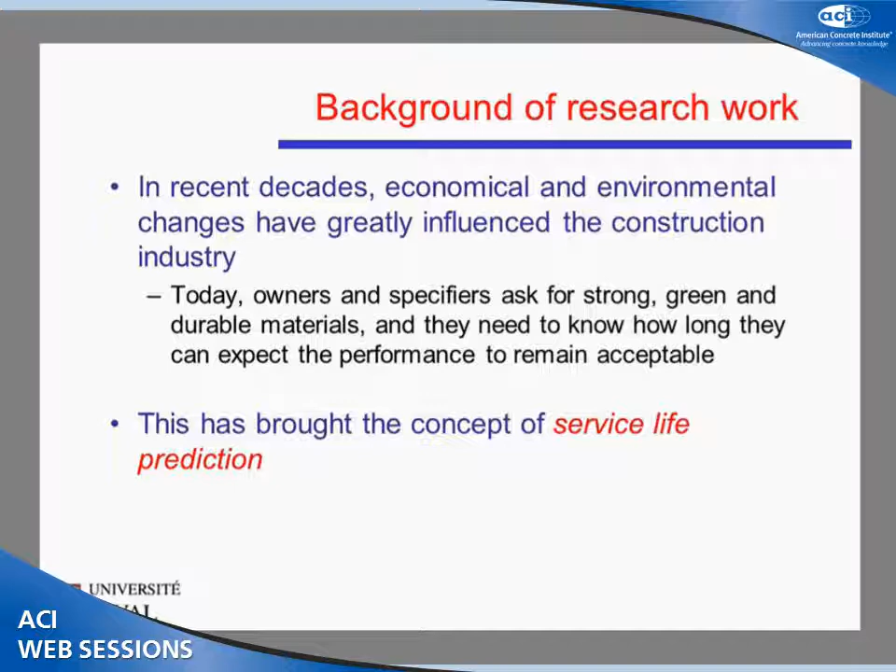And this has brought up the concept of service life prediction. Now in the concrete industry, those changes came along with performance-based specifications and models that allow a quantitative evaluation of the durability of concrete. Now a lot of work has been done on regular cast-in-place concrete, but very little information is available on that subject for Shotcrete specifically.

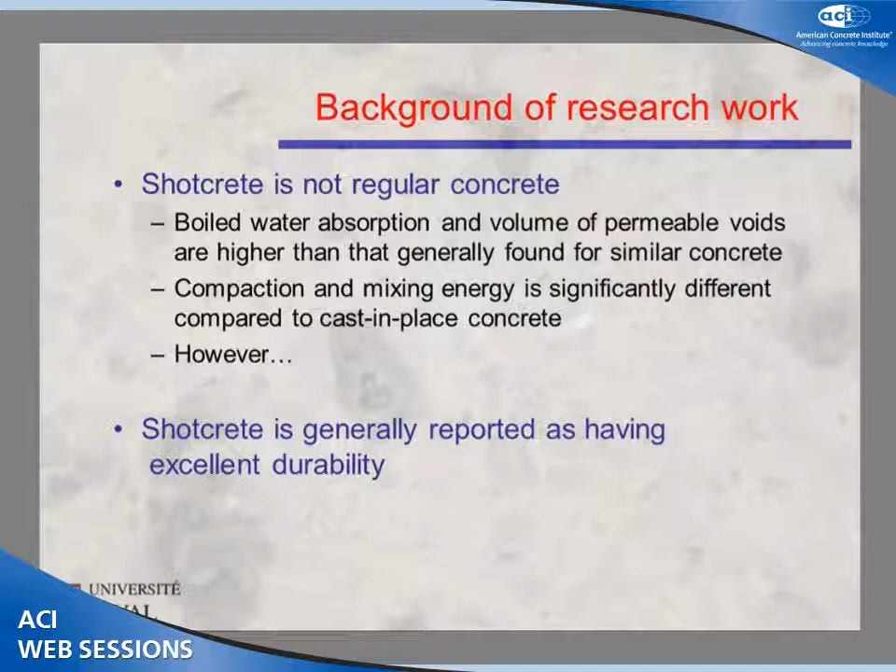However, even with these higher absorption values, it is generally reported that Shotcrete can have an excellent durability. Another aspect that triggered this research project was that in the Shotcrete industry, the spec usually called for a maximum value of boiled water absorption from the standard ASTM C642.

And for those of you who attended the 506 committee meetings, you know that this was a hot topic, because with the higher boiled water absorption, contractors and producers have to modify and improve the mixtures at great cost. And this has brought a lot of discussion.

What we have here is what was the main reference in terms of boiled water absorption for Shotcrete. This is a table that was built by Mr. Rusty Morgan in the 80s. In his study, Mr. Morgan, from existing structures, compiled several boiled water absorption results and linked the result with the quality of the structure he observed.

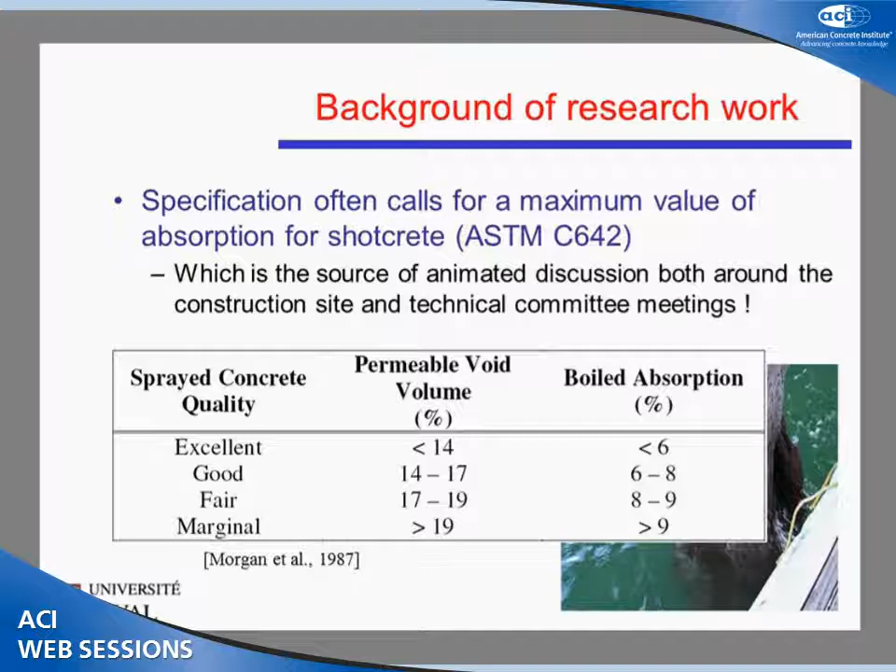Now this is a very useful table because it's easy to use, it's cheap, and it's quick. However, it's important to understand that it can lead to misleading results because it was used by engineers as a durability criterion, and we'll discuss this later.

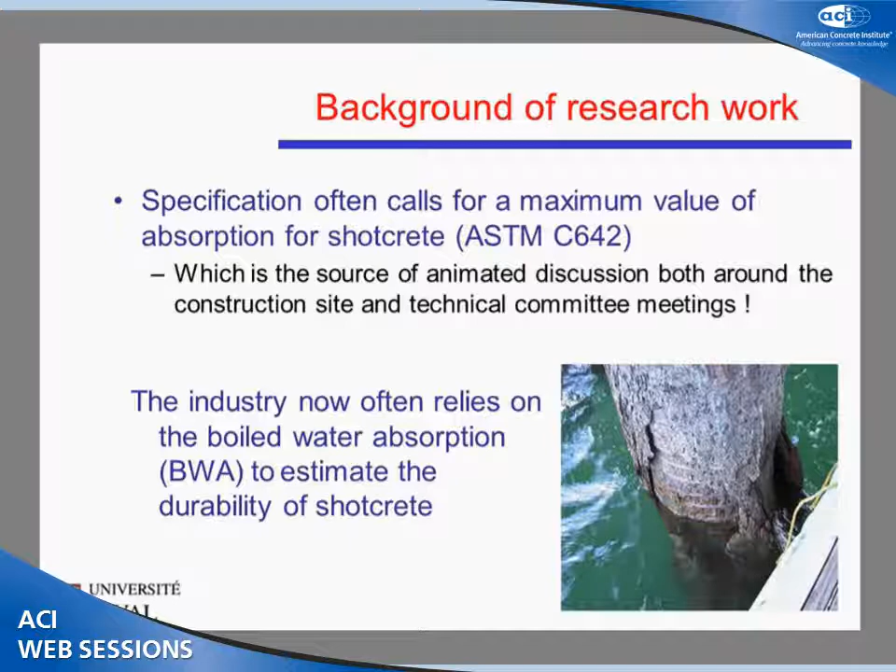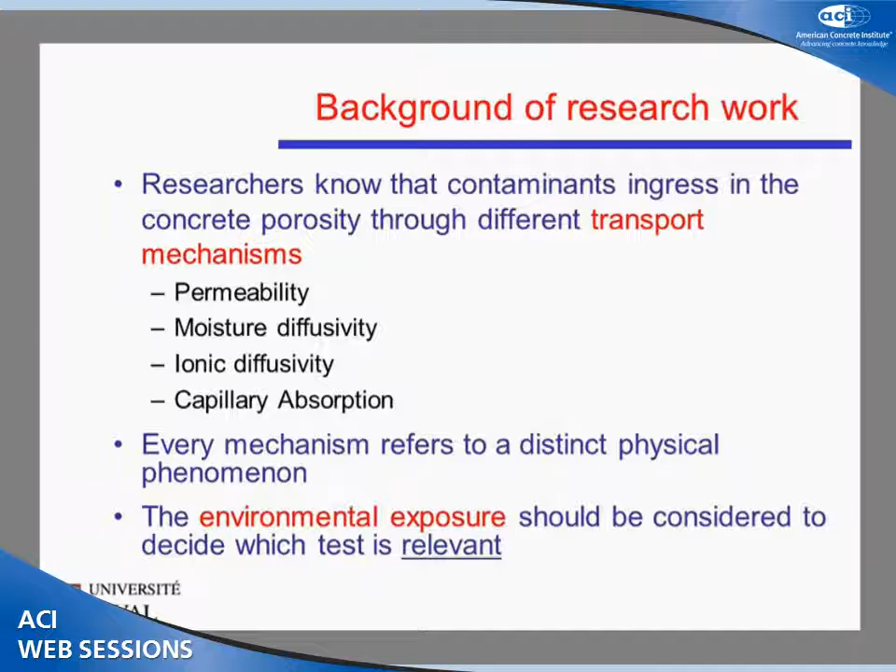Now why this table can be misleading is that it is now well known that contaminant ingress in the concrete porosity relates to different transport mechanisms, such as permeability, moisture diffusivity, ionic diffusion, capillary absorption, which are all different physical phenomena. This is very important to understand because the boiled water absorption test only indicates the capillary absorption. Also, depending on the environmental exposure to which the structure is exposed, it doesn't necessarily mean that boiled water absorption will be the relevant test.

So we saw that there's no existing data on Shotcrete service life and that a questionable test is used as a durability criterion. With this information, there was a need to go further on that subject, and that's what triggered the research project.

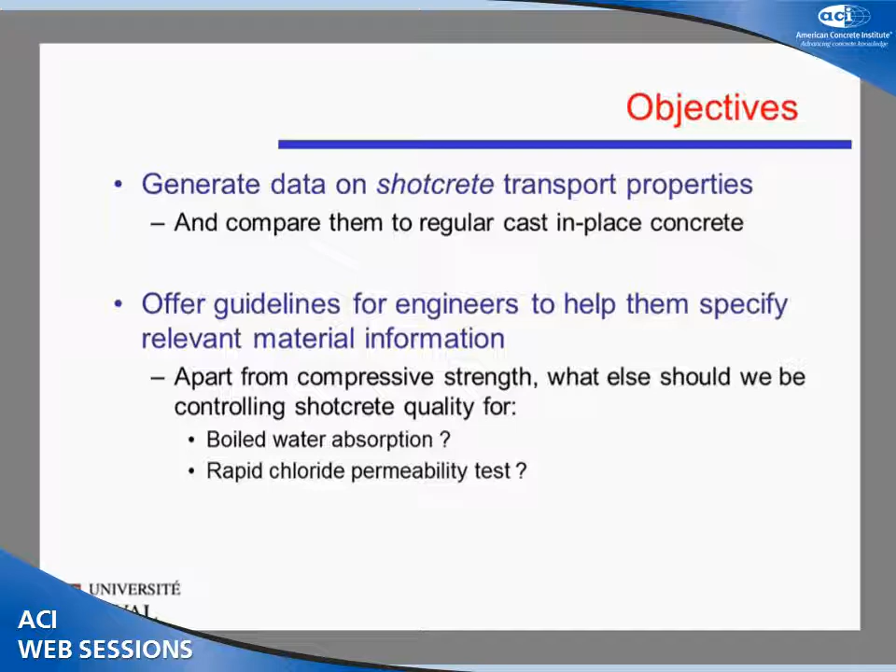The objectives of the project were first to generate data on Shotcrete transport properties and eventually compare them to regular cast-in-place concrete, and to offer guidelines for engineers to help specify relevant material information. Apart from compressive strength, what else should we specify? Boiled water absorption? Rapid chloride permeability tests? Should we go further? That was one of the objectives.

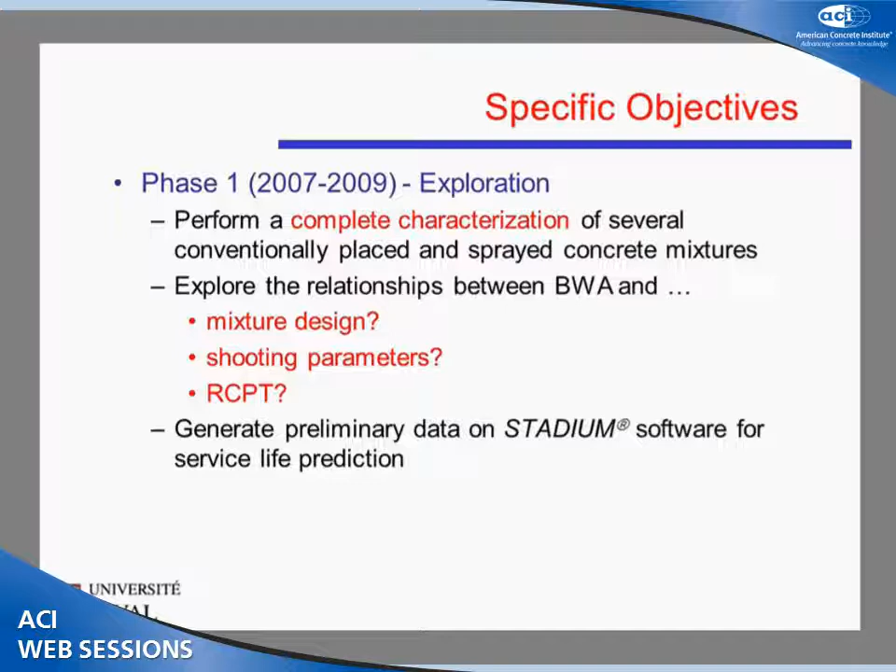The project was divided into two phases. Phase one, which was my master's project, ran between 2007 and 2009. We performed a complete characterization of several cast-in-place and sprayed concrete mixtures. The objective was to explore the relationship between boiled water absorption and mix design, shooting parameters such as speed of impact and pre-dampening, and to evaluate if there's a relationship between boiled water absorption and rapid chloride penetration tests. Another objective was to generate preliminary data on stadium, which we'll discuss later, for service life prediction.

Based on my results, Patrick's project is phase two. His objectives are to perform a complete characterization of a more focused mixture selection based on the results we already have, to confirm or invalidate the data from phase one, and to perform refined analyses using a service life prediction software.

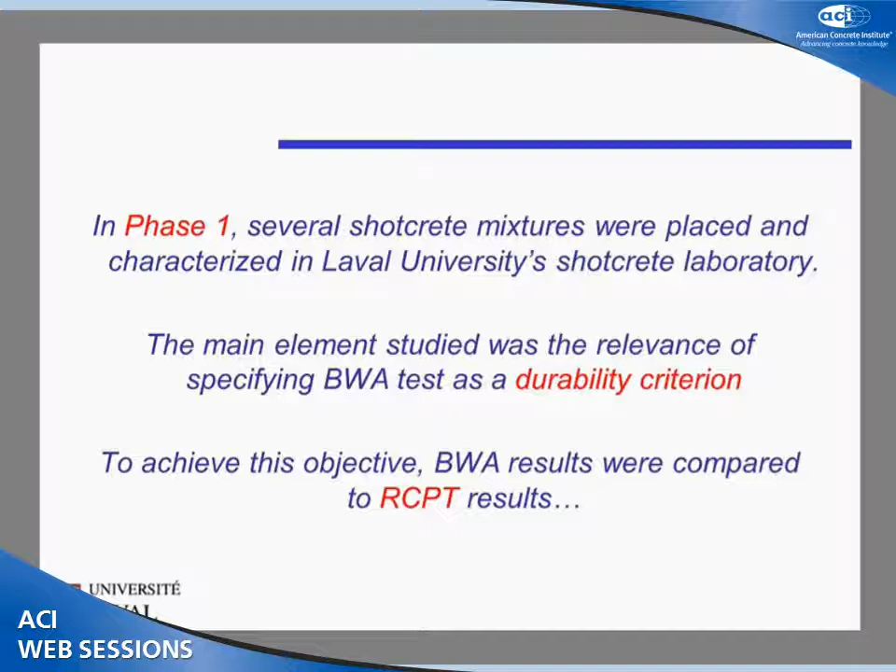We're not going to go over what was done in phase one in detail, just talk quickly about one key element. I won't bore you with the experimental program since it was already published and presented in St. Louis in 2008. I just want to look back at one key result: the relationship between boiled water absorption and RCPT results.

To assess the correlation between these two test results, data were plotted on a graph, which is what we see here: RCPT results against boiled water absorption results. It's important to know that RCPT is a test to estimate the ionic diffusion of the material, and I say estimate because it's not necessarily dead on. The boiled water absorption test is a test that measures capillary absorption.

What we see here are the limits that were set by Mr. Morgan in the table discussed earlier, and these are the results from the Shotcrete mixtures characterized in our lab at Laval. At first sight there's no direct correlation between the two tests. But going further, these are limits found in ASTM C1202, the RCPT standard, which indicate the chloride ion penetrability.

The first: the point at the bottom right is a mixture qualified as very low penetrability, but it would have been rejected because it's marginal based on boiled water absorption. Looking at the results up top, the mixture would have been classified as excellent based on boiled water absorption, but RCPT tells us it has high chloride ion penetrability. So this graph points out that the absorption test can lead to misleading information.

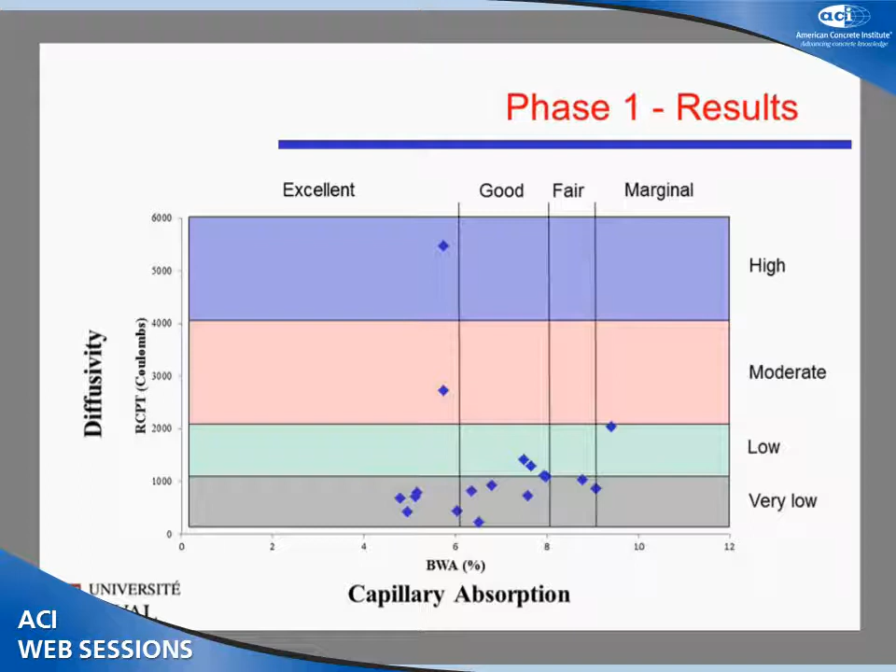We wanted to understand why the data were so scattered, and we realized that all the mixtures in the cloud down there contain silica fume. The mixture here contains fly ash, and the one up there contains only ordinary Portland cement. So we see the influence of supplementary cementitious materials.

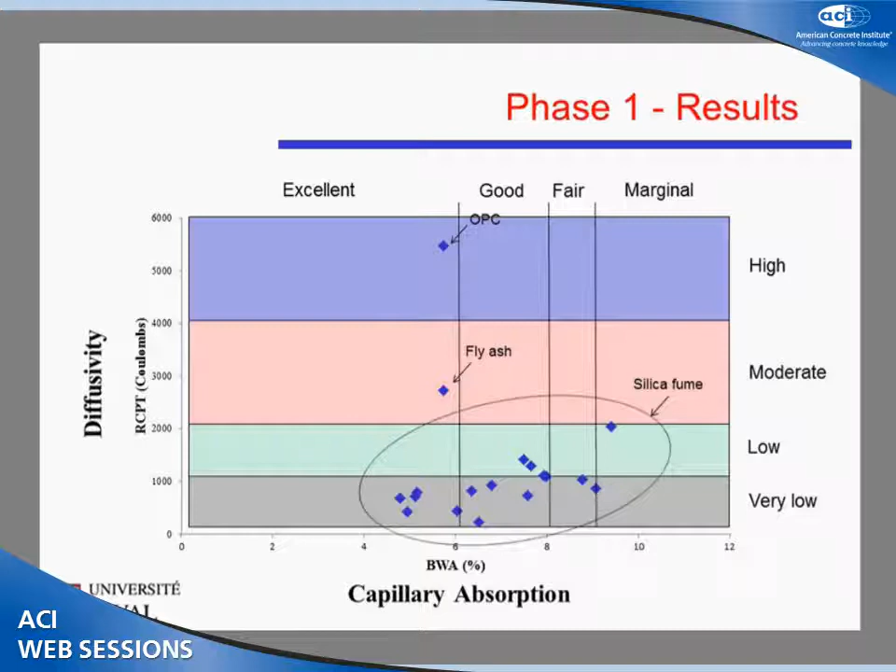This brings us to service life prediction. From the phase one results, it appears that boiled water absorption poorly correlates with rapid chloride penetration tests. It's also worth noting that RCPT doesn't necessarily help owners and engineers estimate the service life of their structures—it gives you Coulomb results, but doesn't tell you how many years you can expect your structure to remain in acceptable condition. So the next step in our investigation was to answer: how can we predict service life of Shotcrete?

So there are numerous models that are available to predict the service life of concrete. Here, when I'm talking about service life, it's mainly related to the time to initiate corrosion. It doesn't include freeze-thaw effects or others.

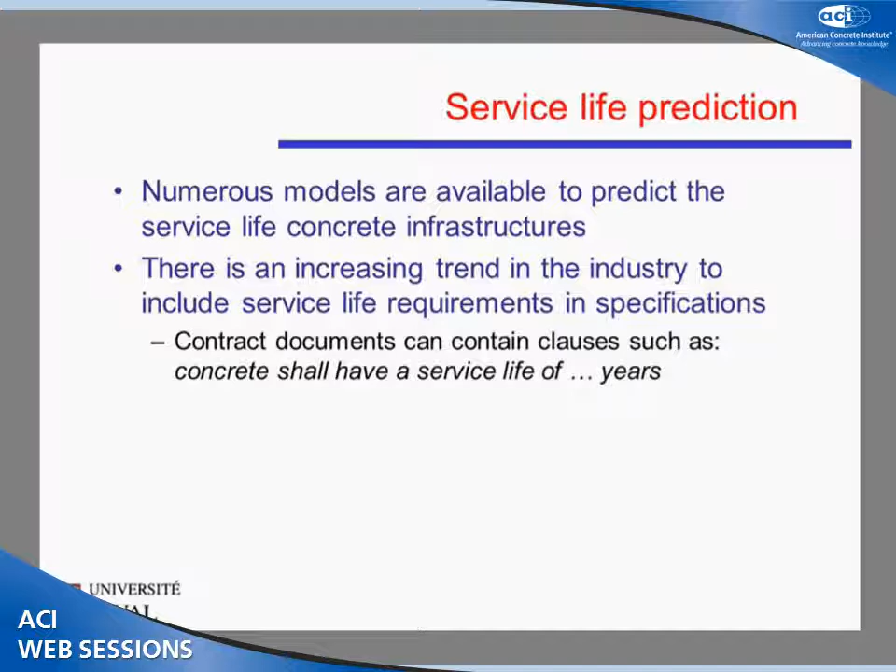So there are numerous models, and it's worth mentioning that these models are no longer only used in the lab for research, they are used in real projects. You will find clauses in contract documents that say concrete shall have a service life of blah, blah, blah years. This is becoming more and more common. It was the case for the Panama Canal, but also for smaller projects such as parking structures, rehabilitation projects, or any other structures for which durability might be a concern.

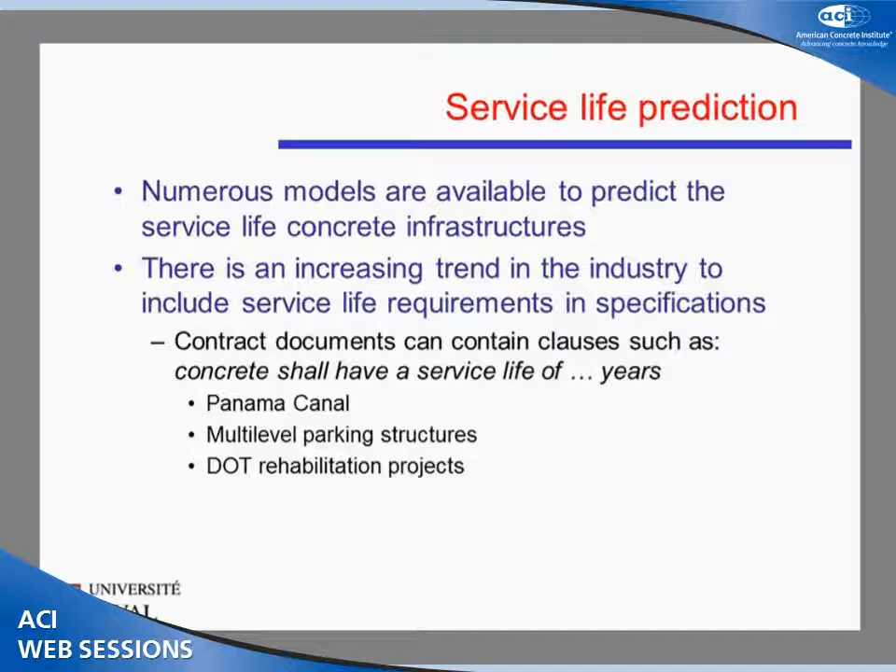Now, as I said before, very little information is available for Shotcrete specifically. So what we did in our case, we performed several tests that are required as inputs for service life prediction.

I'm talking here about a migration test, which is a modified version of ASTM C1202, the regular boiled water absorption test, an in-house drying test, and an analysis of the pore solution of the mixture tested.

With these results, we were able to use these inputs in a service life prediction software called Stadium. Stadium is a numeric tool that predicts the ingress of corrosive species in cementitious materials.

With these inputs, the model is a multi-ionic model that considers both mass and energy transport equations and chemical equilibrium equations that are necessary to understand how the contaminant ingresses. There could obviously be a lot to be said on this software, but that's not the intent today. We just used it as a tool to generate data on Shotcrete service life. So we're going to leave it like this for this presentation.

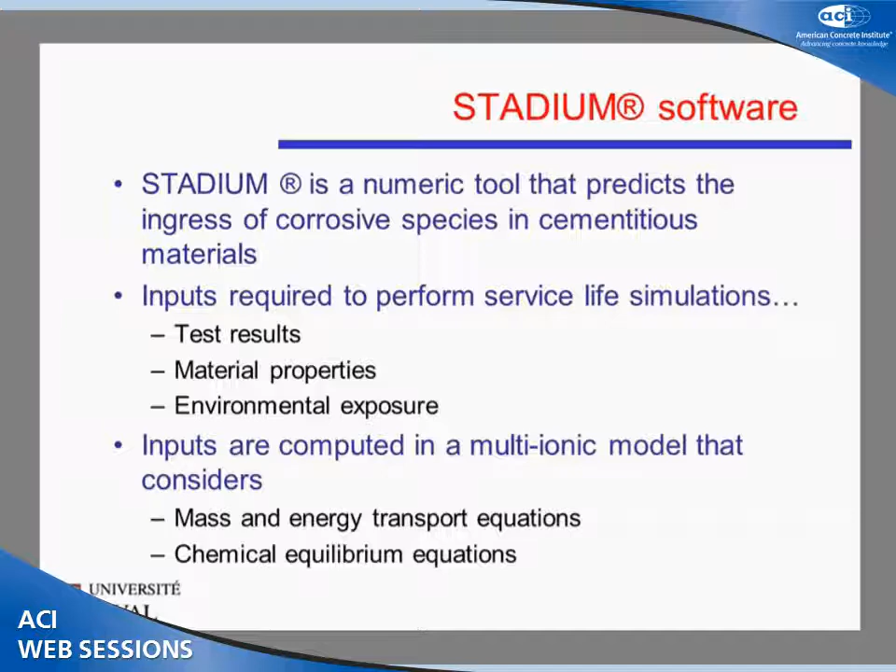Thanks, Sam. This is the first part of the Stadium part of our project. Essentially what we have here, there are two things I want to point out. The first is the geometry of the structure that's being considered. We decide what type of geometry we want to use to simulate the conditions that you would have in situ. The second is the environmental exposure that you would consider for that structure or section of the structure.

For example, the location we are considering is Quebec City. The exposure type is seawater. You can see here that this structure is saturated on one of the surfaces for a short period of time.

As a matter of fact, there's a chloride content here, so it's completely submerged for part of the year. And then for the rest of the year, it's actually dried at humidity about 70%, which is normal for Quebec City. That's how we design our simulation.

You can also vary temperature. You could take this and change temperatures. You could also change the amount of chloride that you're considering, is it seawater, is it de-icing solution. That can change. You can also change the humidity percentage.

Another thing I was going to forget to mention is that we are considering 20 years. So this simulation is going to run for 20 years.

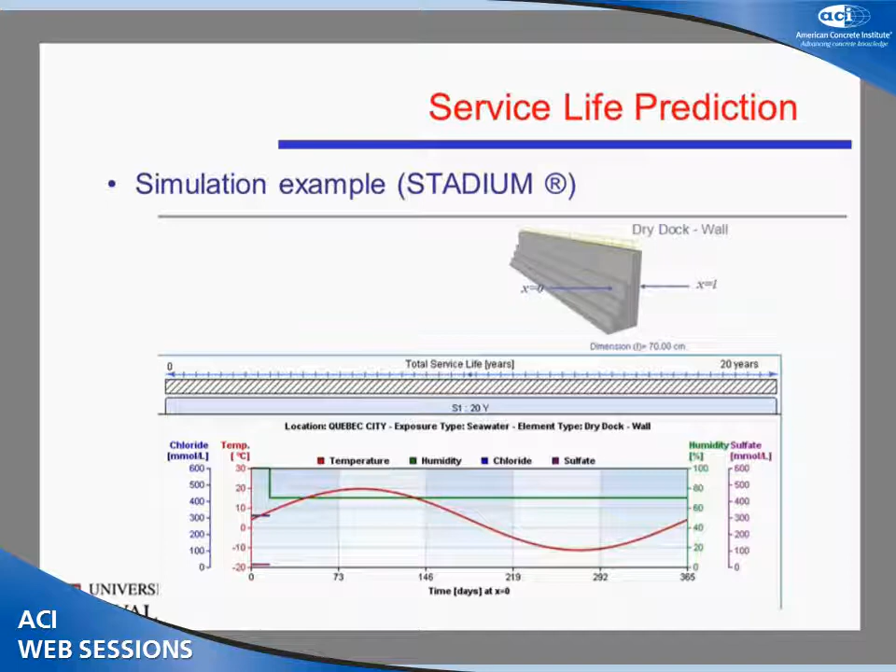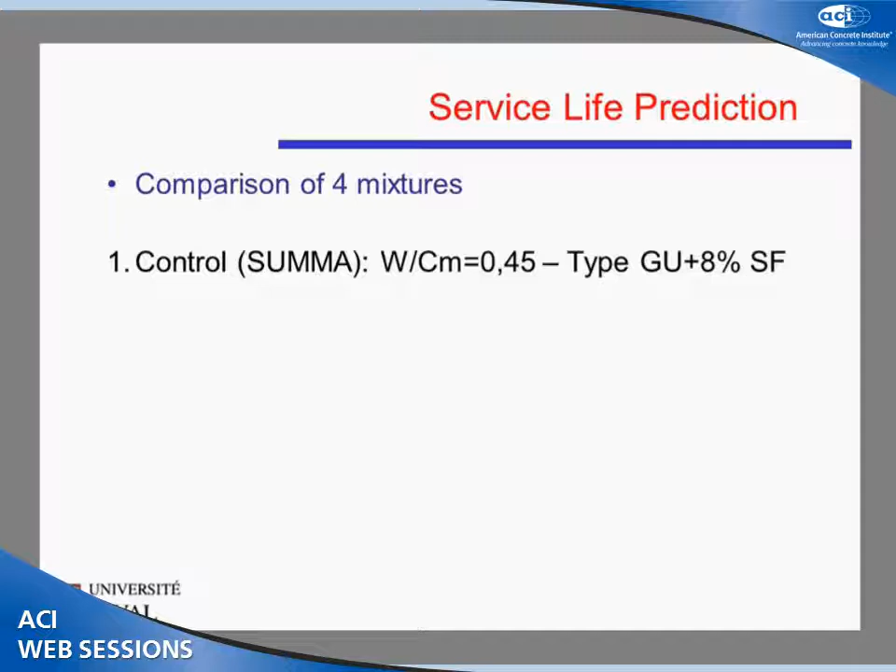For this simulation, we considered 4 mixtures. Simultaneously, 4 mixtures can be considered for that geometry. The first one is a control mixture from the SUMMA data bank, part of Stadium, with a water cement ratio of 0.45, a binder content from OPC and silica fume, 8% silica fume replacement.

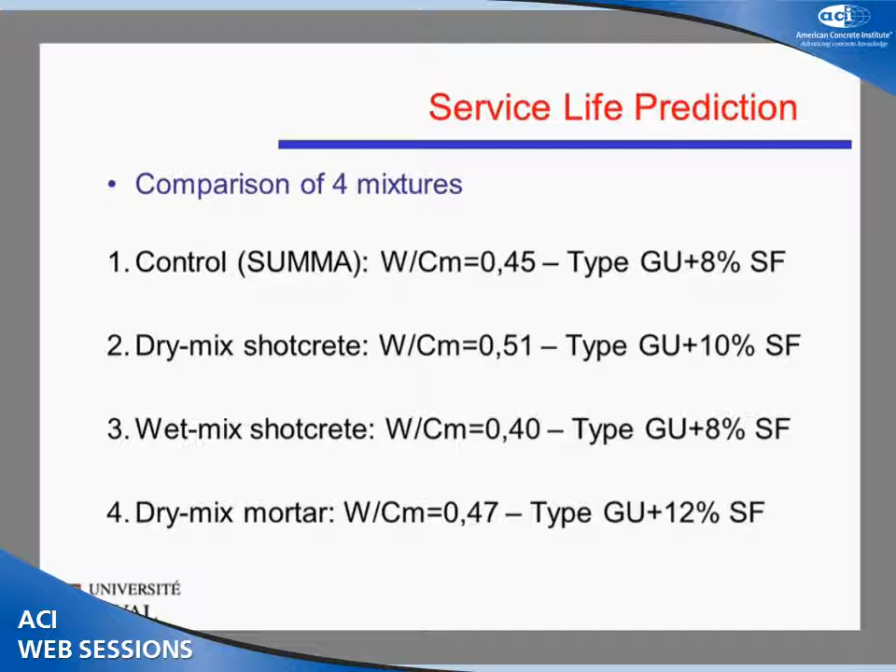The two other mixes we considered are both dry mix and wet mix with silica fume. The first has a water binder content of 0.51 with 10% replacement of silica fume. The third mix, wet mix Shotcrete, has a water binder content of 0.40 with 8% replacement. The last mix considered in this example is a dry mix mortar, with a water binder content of 0.47 and 12% replacement silica fume with type 1 OPC cement.

So this is what it looks like once it comes out.

First of all, let's start with the axes. The first is X, the duration of the simulation, 20 years. You can change that, but we decided to start with 20 years. The Y-axis is the total chloride content at

25 millimeters, about an inch. You could also change that. You could consider 2 inches, 3 inches. 1 inch is, for example, you could consider that as a bad cover for concrete. So let's be critical here. That's 25 millimeters. What you have essentially is the SUMMA mix on top, followed by the dry mix, the wet mix concrete, and the mortar at the bottom.

Essentially, you can see here that according to the simulation and the exposure, considering both the chloride content I just mentioned and the humidity, you can expect about 14 years service life before you hit the critical threshold. A critical threshold we chose for black steel, followed also by the other mixes which follow shortly after.

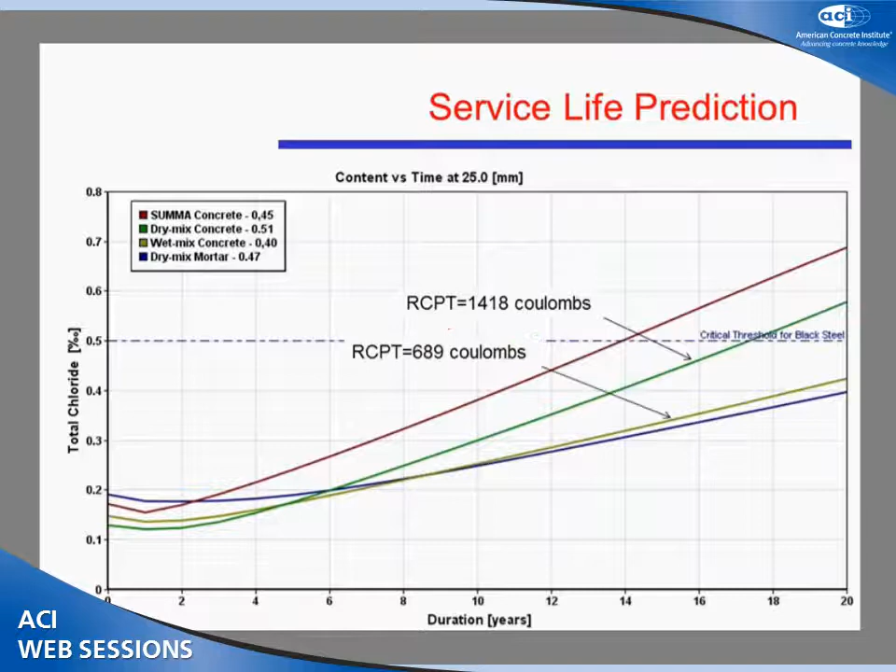What happens if we consider ASTM C1202, RCPT, that we presented just earlier? Well, this time it's not so bad. I'll talk a little more about that later, but it doesn't seem so bad. You have, for example, the dry mix concrete that hits 1418 coulombs, just as a rough value. Remember, it's between 0 and 9,000. 9,000 is a critical value that you rarely get, and you want to go around 1,000 to 3,000 for something standard, where under 1,000 is excellent according to the ASTM norm.

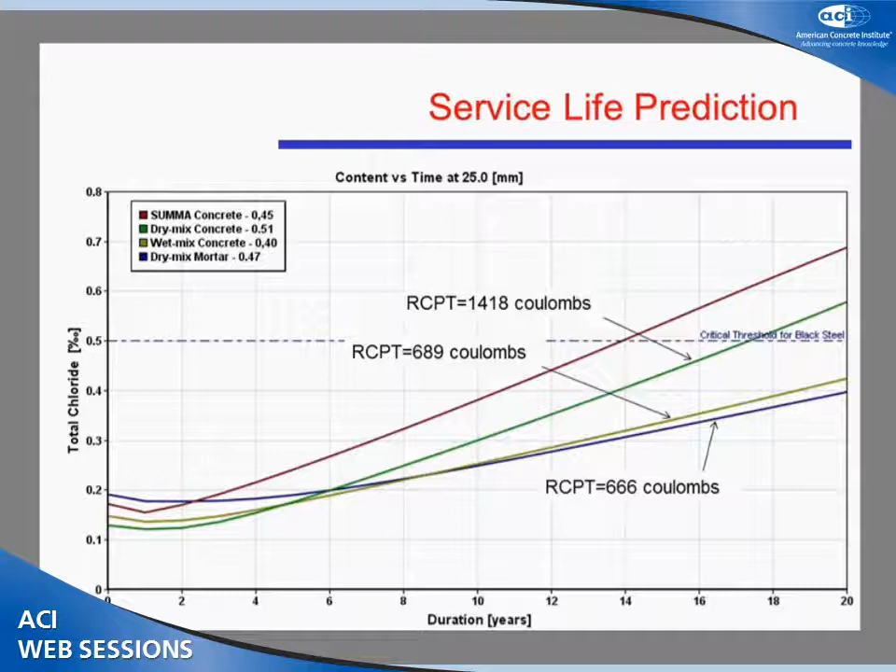So this is not so bad. It actually somewhat correlates with this analysis. However, that's only for 3 mixes. What happens with the rest of the mix designs that exist in industry right now in North America, and as a matter of fact, the rest of the world? This is only for 3 mixes, and that's what really motivated us to keep going with this.

So based on results from phase 1, we decided to go further with that. We decided to expand the mix designs that could be represented for industry. The goal we had in mind was the goal that Louis-Sam just mentioned earlier: we wanted to have essentially information, and hopefully a line drawn to service life assessment of Shotcrete.

These are the mix designs we selected. Actually, these are the mix designs offered to us by industry, because we wanted mixes from industry. I'm just going to go quickly here, there's a lot of details. This is essentially what it is: the first 3 are mortars. The first 2 are dry mix mortars. The third one is a wet mix, all OPC, with essentially the same ACI number 1 grading.

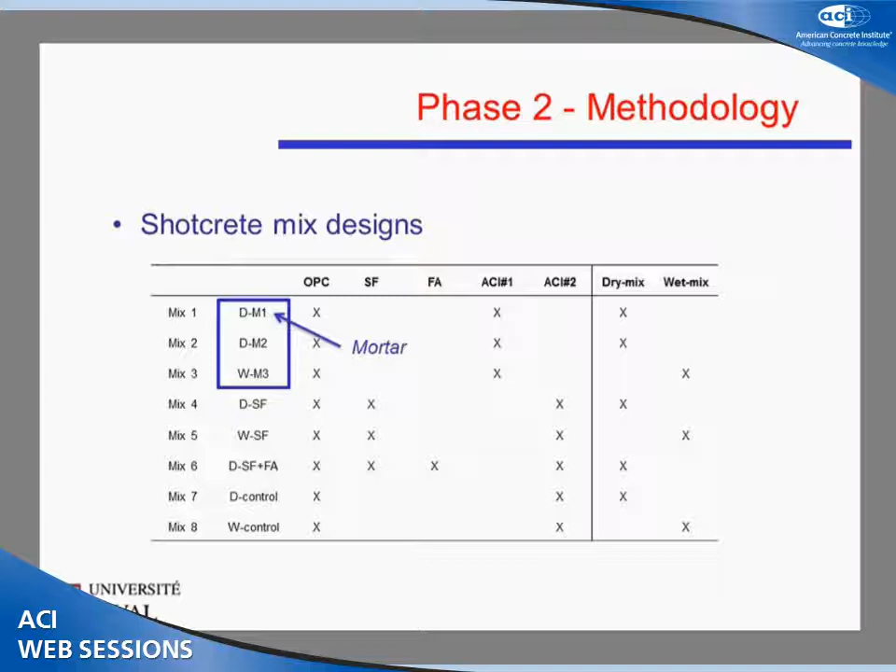The second group of mixes is silica fume shotcrete, so coarse aggregate, both dry and wet mix. These are common in East Coast Canada and the United States, Northeast. The third mix to be considered is a ternary binder, where the ternary binding agents are OPC, silica fume, and fly ash. This is usually more found on the West Coast and Vancouver. This is actually where the mix is from, Alberta, Vancouver.

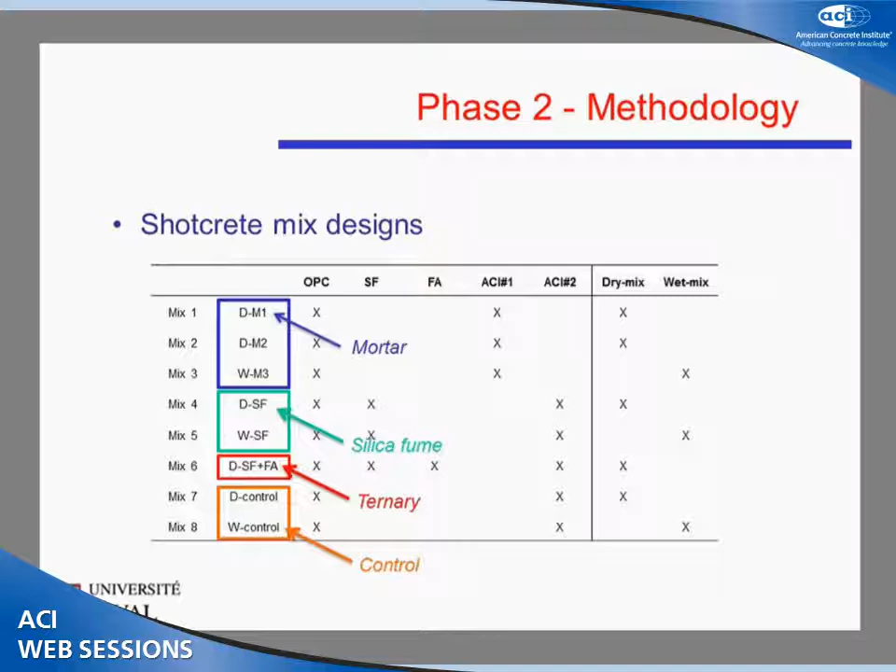The control mixes, because you've got to have control mixes. We have a dry mix and a wet mix, again with the same coarse aggregate grading, just to have an idea.

Now, how do we shoot the material for phase 2? We wanted to control the shooting energy into our panels. This is something that one of my colleagues, Nicolas Ginouse, is studying as part of his doctoral studies. So we wanted to control the shooting parameters. How do we do that?

Well, first of all, let's represent industry. Let's shoot perpendicular, you want to have maximum impact energy, so let's start with that, followed by two other things. The first is the distance. We're going to control the distance at about 1 meter, give or take an inch or so, so 3 feet 4 inches. And we also want to control the airflow.

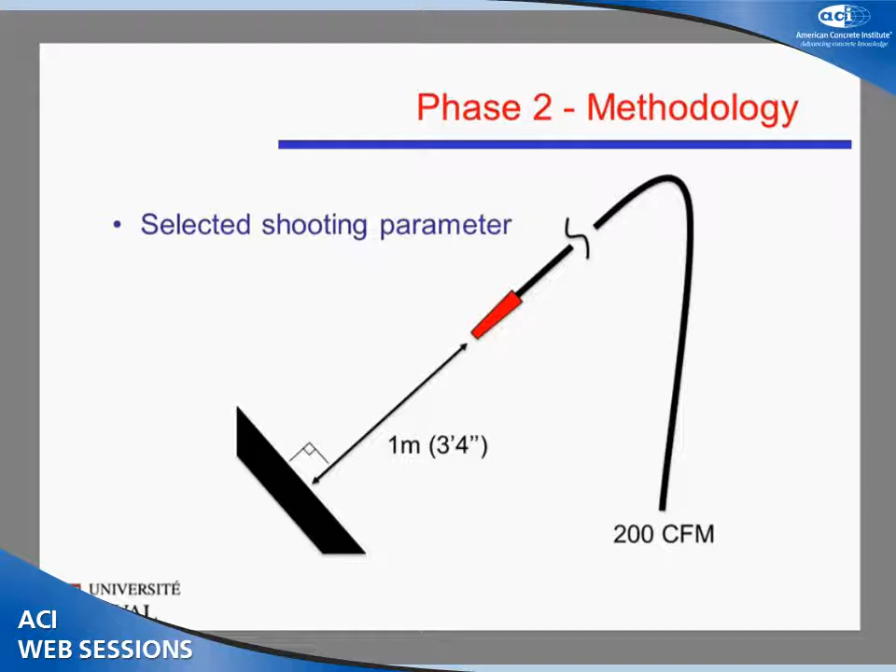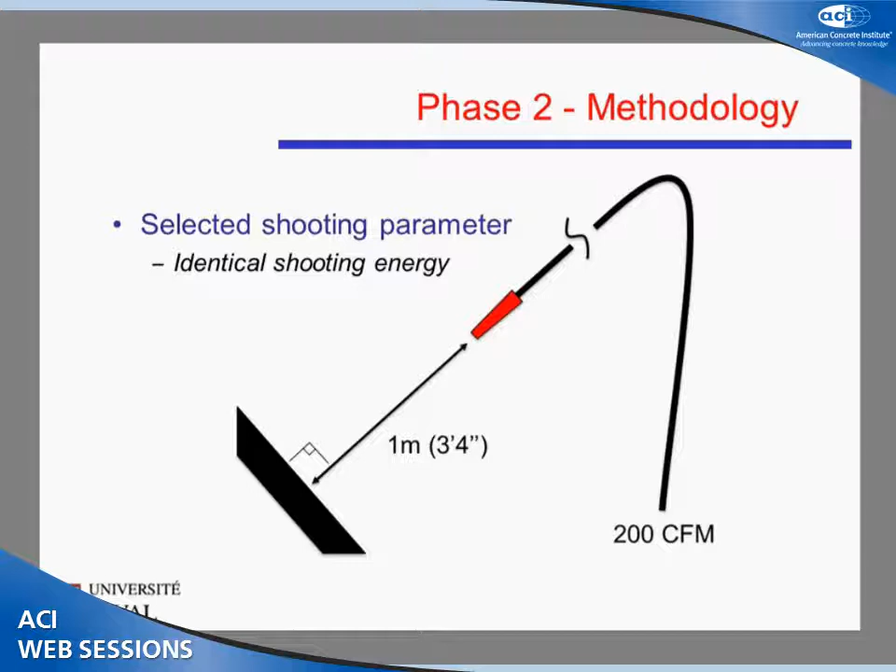Now this is 200 CFM. We chose 200 CFM as it's slightly over what we consider in-lab optimal conditions, just to get a little more compaction than you would need. This is the airflow that's measured in the nozzle, not the airflow you would see on the compressor, for example. What does this allow? It allows identical shooting energy. Essentially, it locks in a lot of variables that would otherwise provide a lot of variability in itself, in terms of energy, how it compacts.

So what happens? We shoot 5 panels. For all the mixes considered, we shoot 5 panels. 3 of the panels are cored. 2 of the panels are actually sampled directly from these panels, avoiding essentially about an inch from the bottom. We don't want to have too much paste in it. We want a representative sample.

And so the 2 panels that we sample, we put into an 80-liter planetary mixer. This provides a lot of samples to test with. Essentially, for the cored panels, we want to have 3 times the 3 panels, so 3 sets of samples to test. And that's actually very interesting for dry mix because there is some variability in dry mix. We want to evaluate that.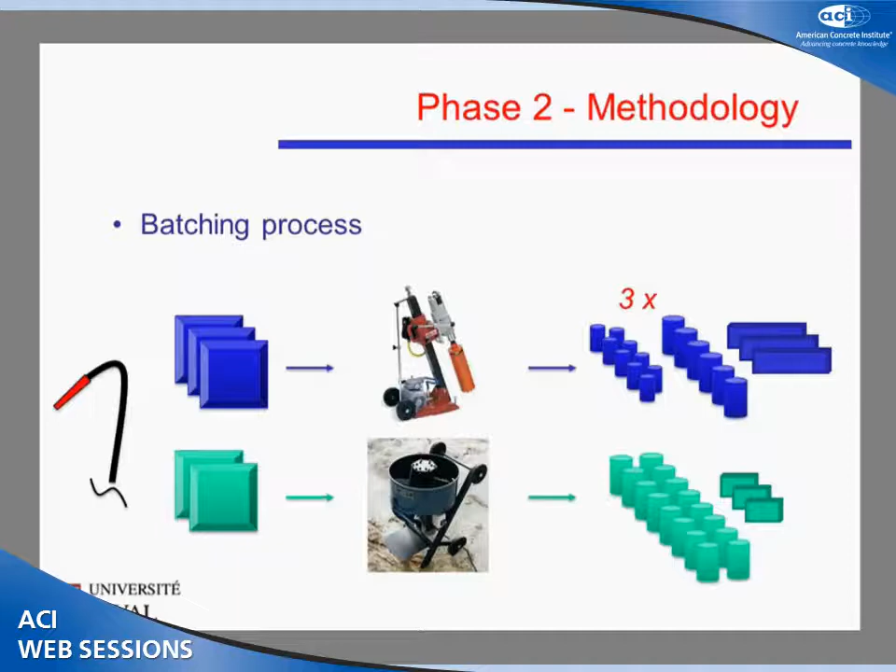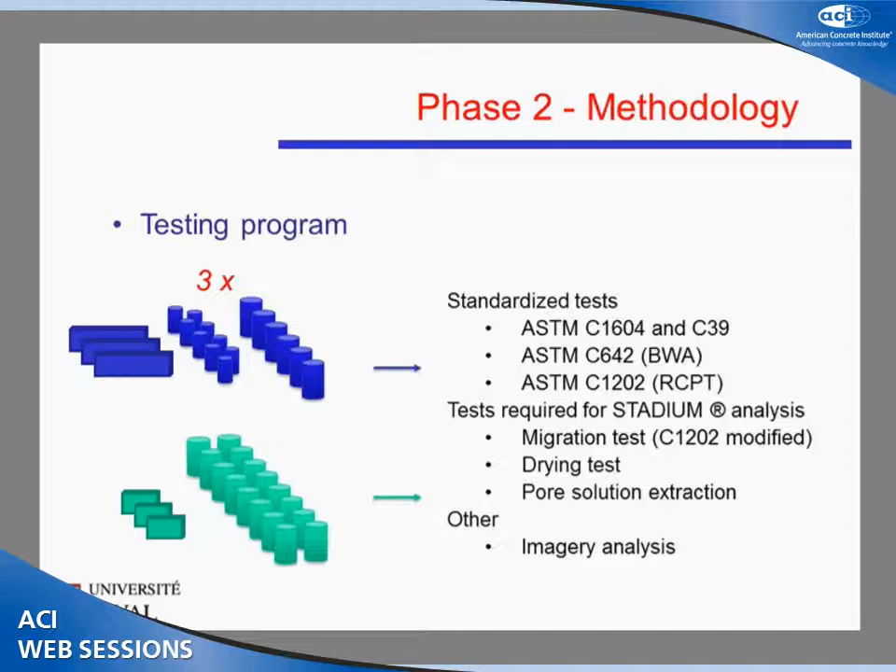Now the testing program is pretty much the same as my colleague in phase 1. We have the standardized tests, the compression strength tests at the top, followed by the C642 and 1202, and of course the tests that are required for STADIUM analysis that we input into Stadium Lab, followed by the imagery analysis, which I won't get into very much, but it's a very promising prospect.

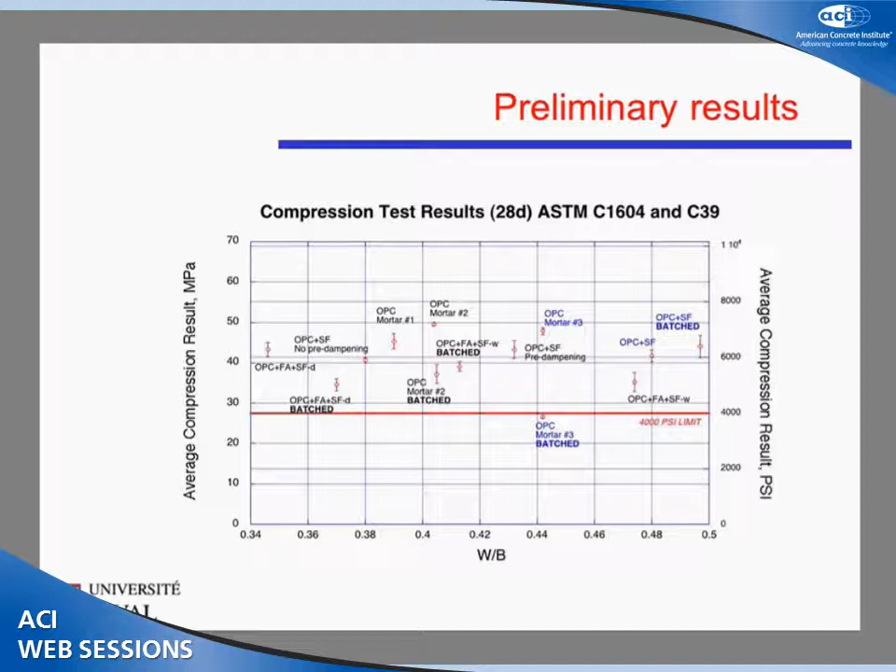The other interesting thing I wanted to say is that the water binder ratio is across the board, and it doesn't necessarily correlate with compression strength, and that's because mix design has a lot to do with it. Not just water binder ratio, but what type of aggregates you have, what type of binders you use, how much binder you have per cubic meter, for example. It plays a lot, and so you can imagine how that plays into durability.

There also seems to be an effect with aggregate, but we won't get too much into that. These are generally the trends I just wanted to point out.

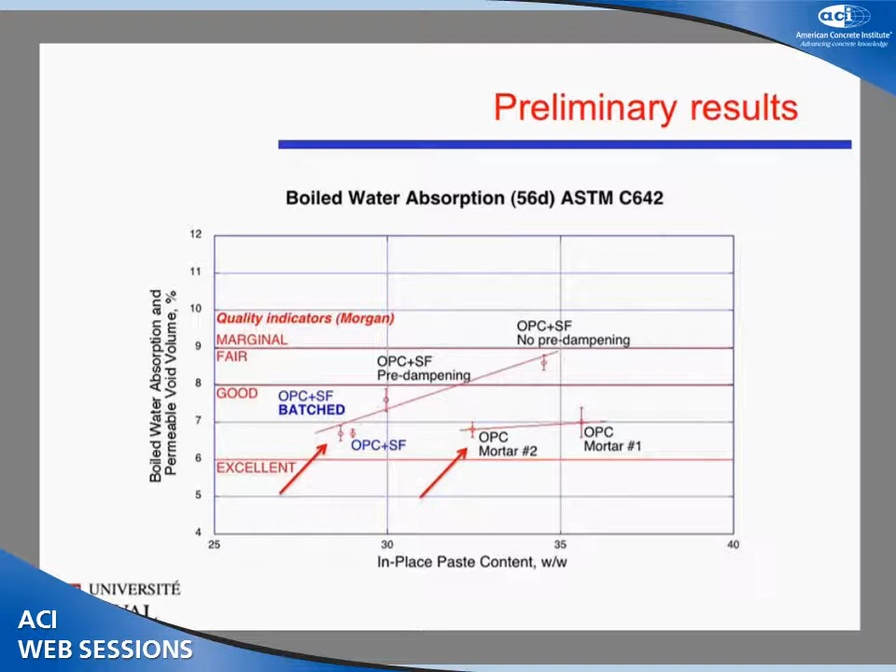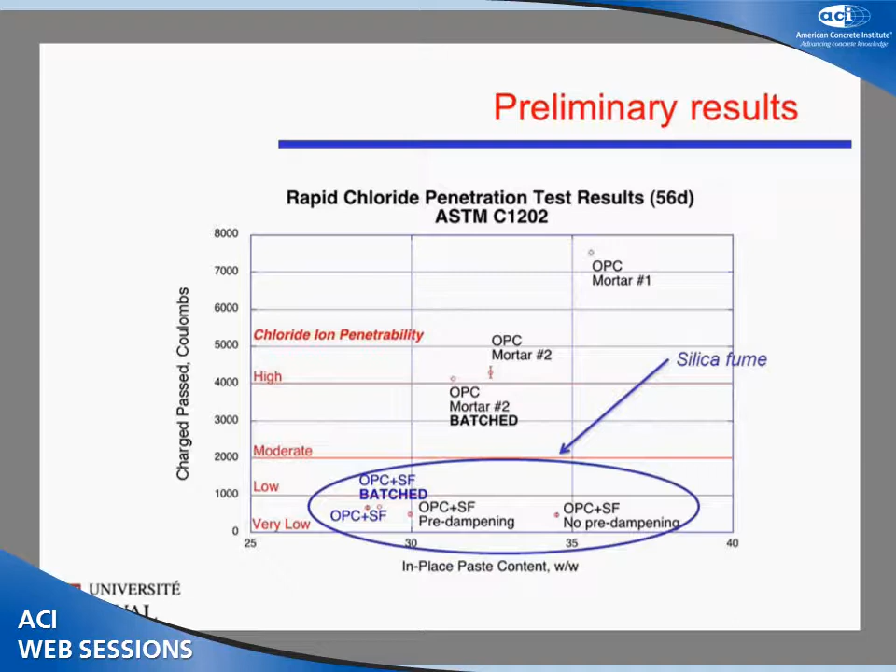Other than that, these are just a few select samples, and I just want to give you guys an idea. This is at 56 days, to take into account the pozzolanic effect of silica fume and other supplementary cementitious materials. So in summary, let's just recap here.

We've presented results from standardized tests, and they're useful for quality control. This is actually something Mr. Bolduc just presented a second ago. If you know your mix ahead of time, there's nothing wrong with testing it again with these easy tests that are relatively cheap and quick to make. It's great for quality control.

The thing is, do we know how long it's going to last based on a Coulomb rating, or based on boiled water absorption, or volume of permeable voids? Can someone stand up and say, well, that one has 12.4% volume of permeable voids, and say that's going to last 67 years? Probably not. And that's what we want to get to.

So we are adapting tests to get a broader understanding of the microstructure of the samples, and therefore we use the tests provided by the STADIUM Lab format.

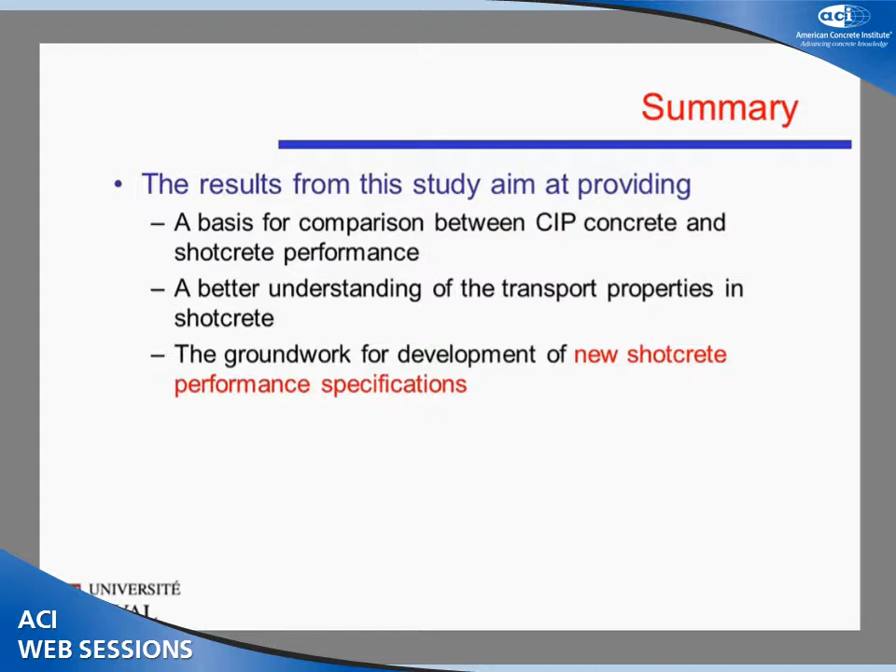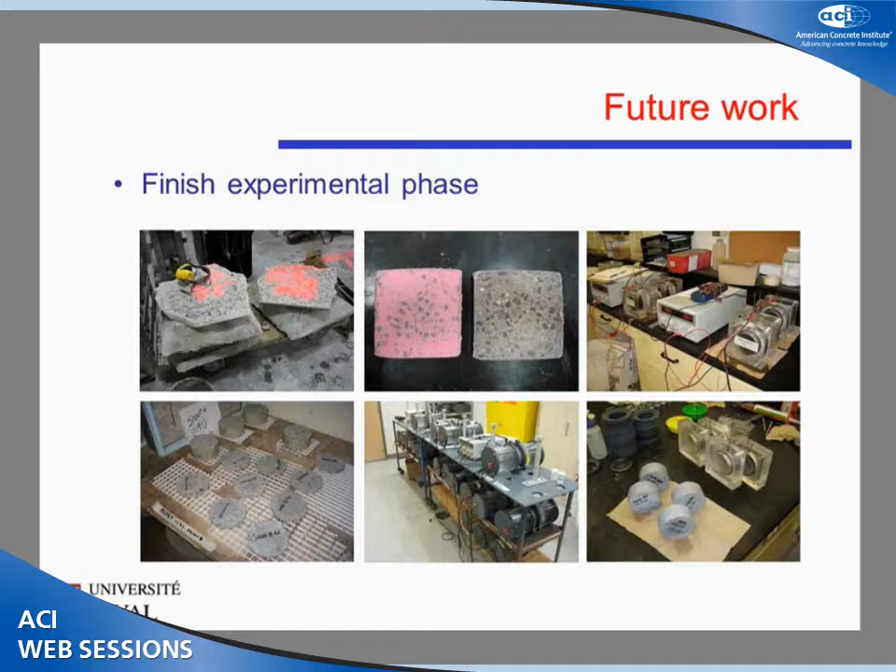Center bottom, you have migration tests. These large cells are about 2.5 liters on either side, and the principle is similar to RCPT. At the top, you have the imagery, and that's what it looks like. On the left, it's just a panel that's been painted over. We're going to sand it to get those big voids out, just to get a broad idea of what it looks like after we shoot it as a hard material.

So after that, once all the batching and wet work is done, we'll take all these shot mixes and batch mixes and process them through STADIUM Lab, then STADIUM analysis. We'll vary environmental conditions to be representative, as we presented with the dry dock.

So would these mixes be used in coastal areas? Would they be used inland for road infrastructure? And what type of salt environment are we considering - a saline environment or de-icer salt? That changes things, because the tide is essentially daily, but the flow of de-icer salt only happens in the spring. So that's something interesting to consider. And also geometry is going to be something interesting to consider.

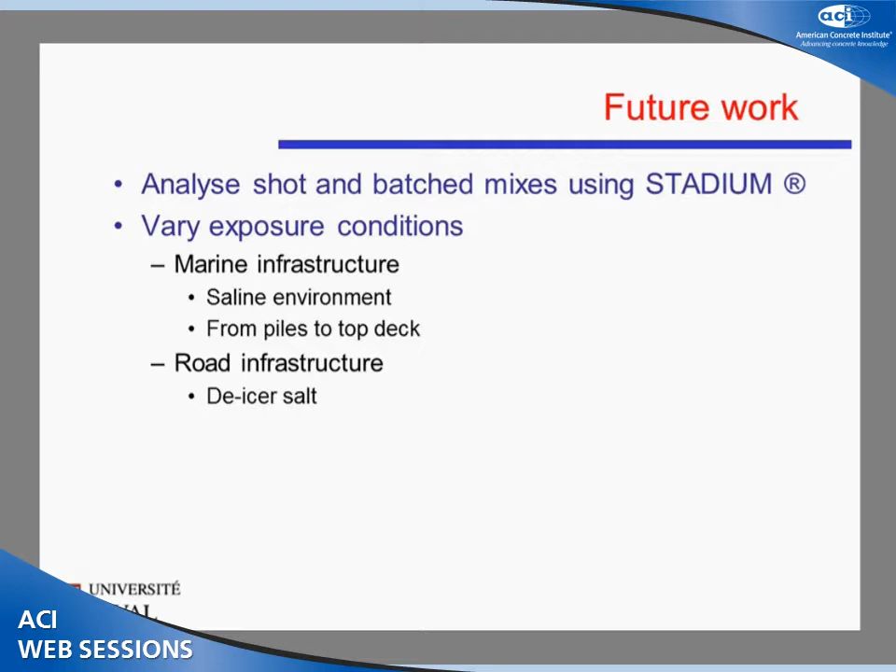And finally, once we have all that data, we can compare it to the STADIUM data bank for further analysis and comparison. So thank you very much.